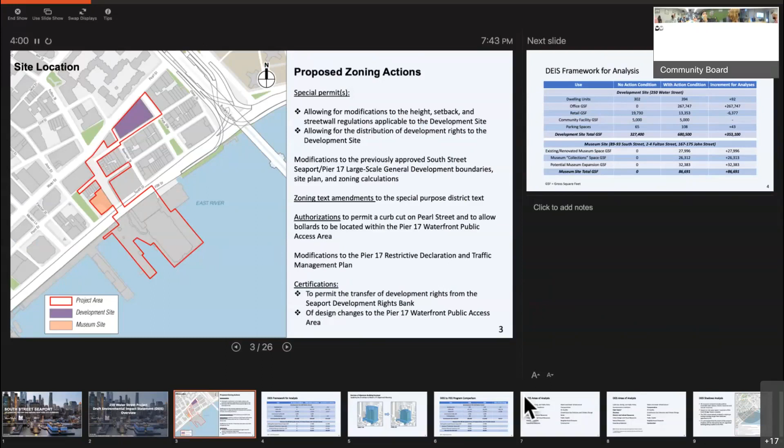So let's talk about the DEIS analysis framework and some of the changes that will be looked at in the FEIS.

For the with-action condition, the DEIS looked at the construction of a mixed-use building of about 680,000 gross square feet, which would contain market-rate and affordable housing, retail, office space, and community facility space, as well as parking.

What the DEIS uses as a basis for evaluating impacts is the difference or increment between the no-action and with-action conditions. Generally, the with-action condition takes a conservative approach in determining a reasonable worst case development scenario, which we came up with alongside the Department of City Planning for analysis purposes.

For example, the EIS uses a standard unit size of 1,000 square feet per unit, which results in a higher unit count than HHC actually intends to build. For the purposes of the environmental review, it's assumed that the proposed project would also facilitate the restoration, reopening, and potential expansion of the South Street Seaport Museum.

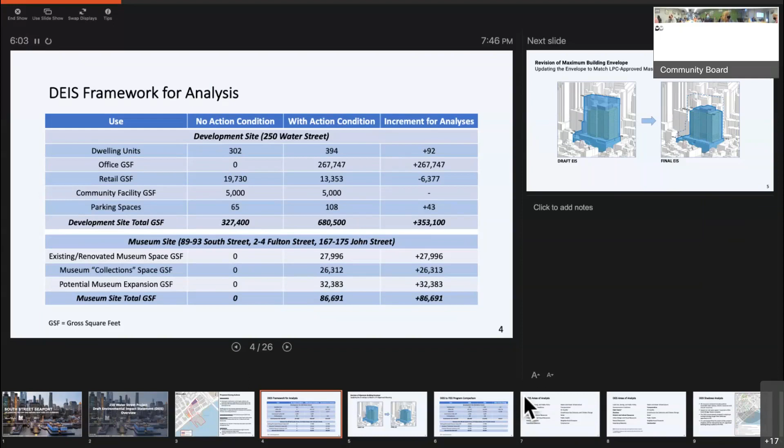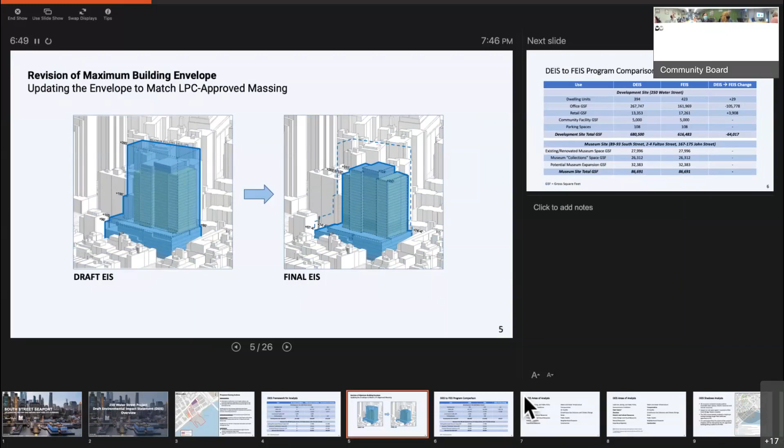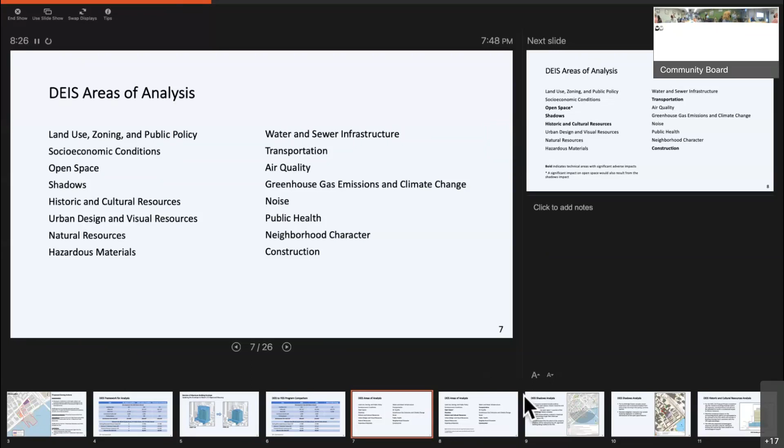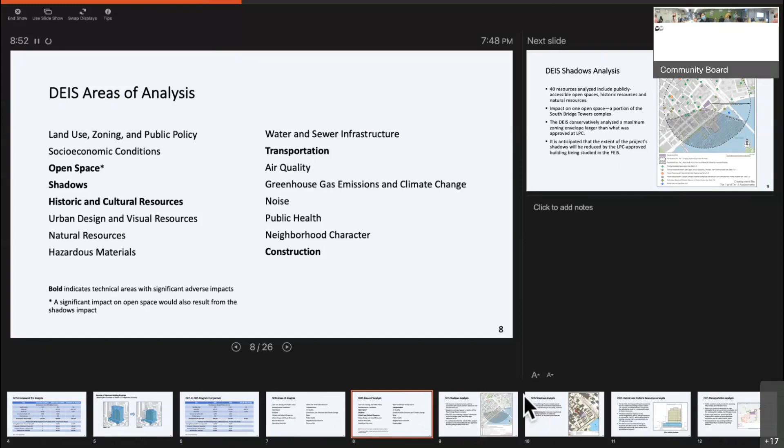This slide shows the areas in which the project could have a significant adverse impact, shown in bold. They include shadows falling on open space, historic resources, transportation, and construction. I'll go through each of these technical areas, discuss potential mitigation, and talk about some of the other areas of concern as well.

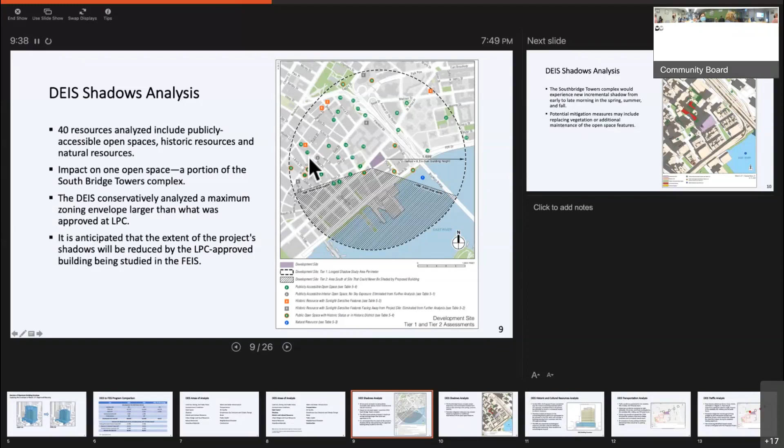It's worth noting again that the DEIS was conservatively analyzing the maximum zoning envelope, which was larger than what was ultimately approved at LPC. As such, we expect that the extent of the shadows will be reduced for the FEIS using the LPC approved building. But we don't expect that the impact will go away.

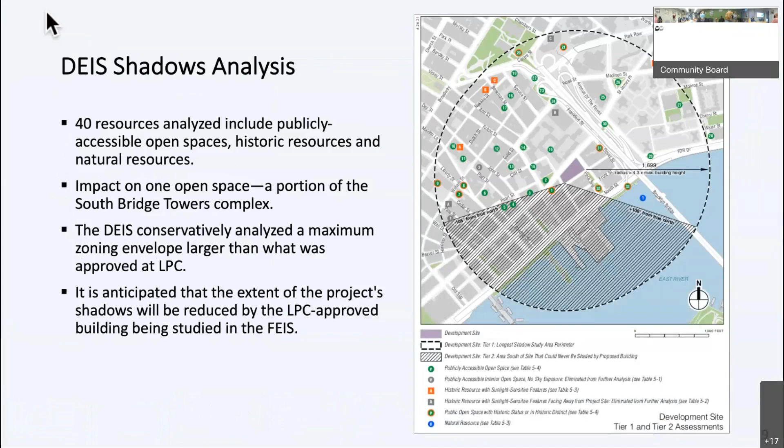Looking more closely at the affected area, and this material is in the EIS, there's a number of diagrams if you want to look at those. You can see that the incremental shadows from the 250 site would fall on certain portions of the Southbridge Tower's open spaces during the morning when the sun is in the eastern sky. This example diagram represents 9:15 a.m. on the March-September analysis day, and more or less represents the maximum coverage. By about 11 a.m., the project shadow would be completely off of the area.

Potential mitigation measures identified in the DEIS could include replacing vegetation with more shade-tolerant plantings, plants that will survive and thrive in the shade, and additional maintenance of the open space features.

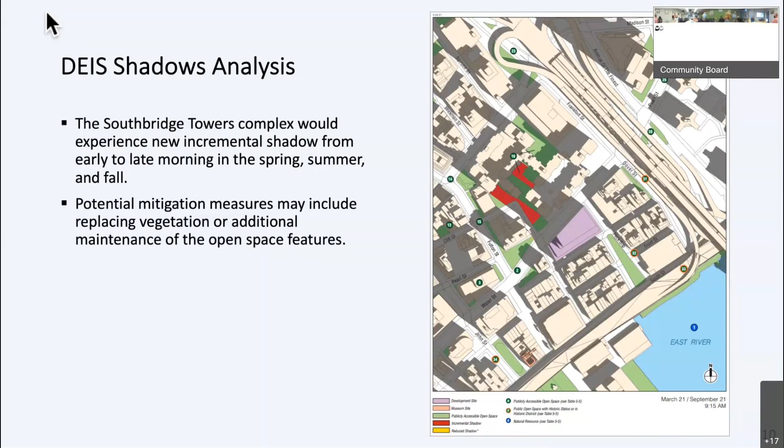The DEIS considered the maximum building envelope and determined that it would have the potential to result in a contextual impact to historic resources. Potential contextual impacts on the surrounding historic district are anticipated to be removed in the FEIS, which will consider a building massing that is consistent with the LPC-approved design. The DEIS also examined archaeological resources, and with a plan for additional testing and monitoring, there would be no archaeological impacts.

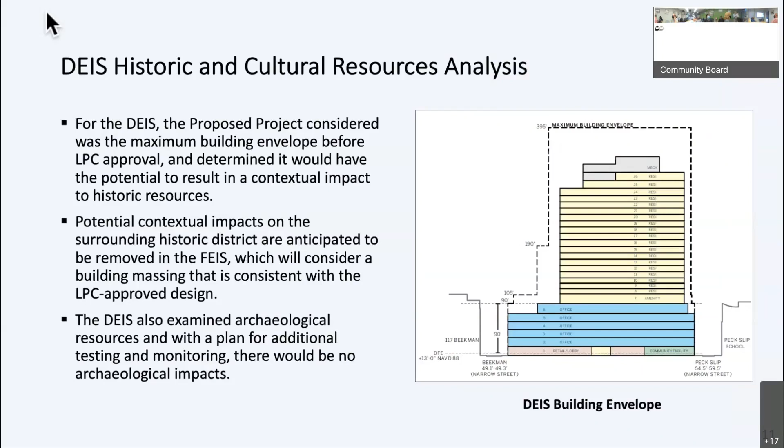The transportation section of the DEIS considered the project's potential effects on local traffic, parking, and pedestrian conditions, as well as public transit services. Traffic conditions were evaluated at 4 Pearl Street intersections for the weekday AM, midday, and PM peak hours. Pedestrian conditions were evaluated at 8 sidewalks, 10 corners, and 3 crosswalks for the weekday AM, midday, and PM peak hours. Transit trips would not exceed the CEQR threshold for analysis of bus and subway conditions, and there would be no impacts to those.

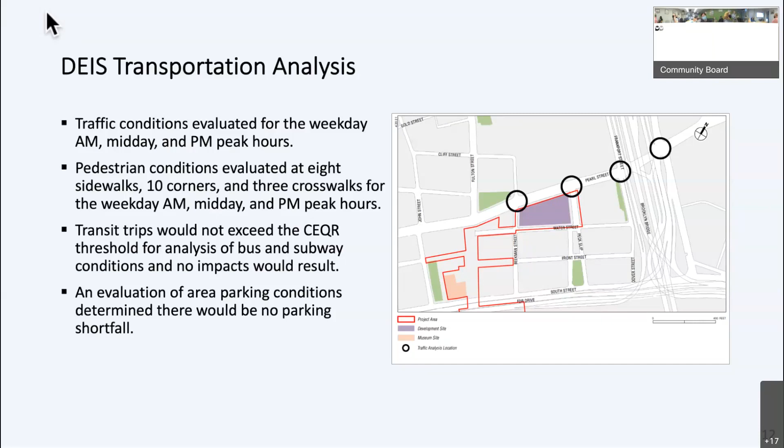An evaluation of parking conditions determined that there would not be a parking shortfall.

For vehicular traffic, potential impacts were identified at 3 intersections along Pearl Street, at Beekman Street, and at the areas next to the bridge. Those are shown in red. Proposed mitigations include signal timing changes at the intersection of Pearl and Beekman Streets, which would fully mitigate the identified impact during the weekday midday peak hour, while the remaining identified impacts would be unmitigated. It's worth noting that the majority of the impacts, which is really delays of getting through an intersection, would be less than 20 seconds.

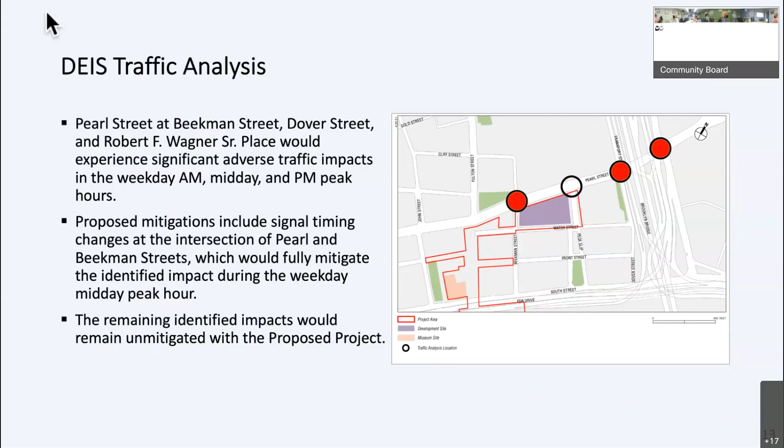For pedestrian conditions, significant adverse impacts were identified for one location, the southeast corner of Pearl Street and Frankfort Street, during the weekday midday and PM peak hours. That corner is shown up under the block in the upper right. The impacts identified at this corner could be fully mitigated by a 6-foot curb extension on the Frankfort Street side of the corner.

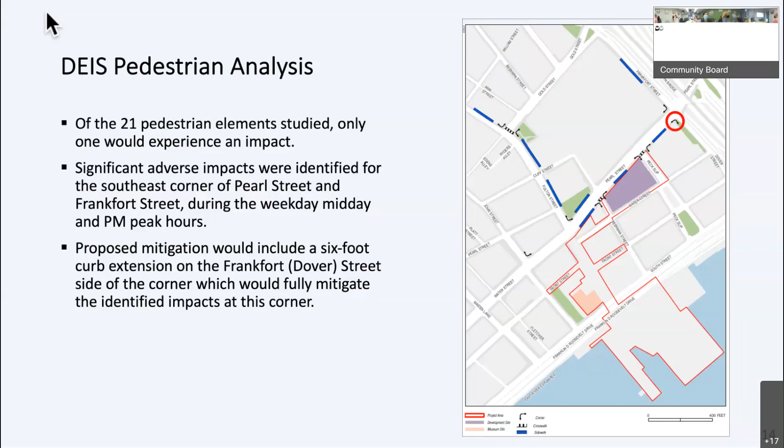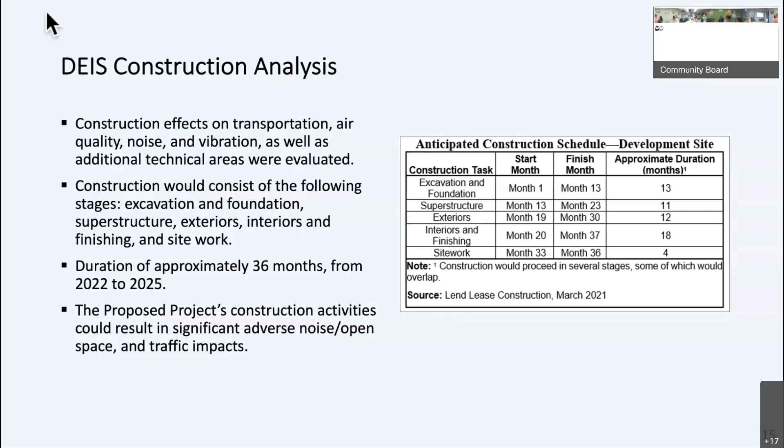The DEIS identified that the project's construction activities could result in significant adverse impacts in terms of noise, including noise to open space, and traffic. For construction traffic, it's anticipated that any significant adverse traffic impacts would be of equal or lesser magnitude than those disclosed in the operational analyses, and that the same or similar mitigation measures could be used to address construction-related impacts.

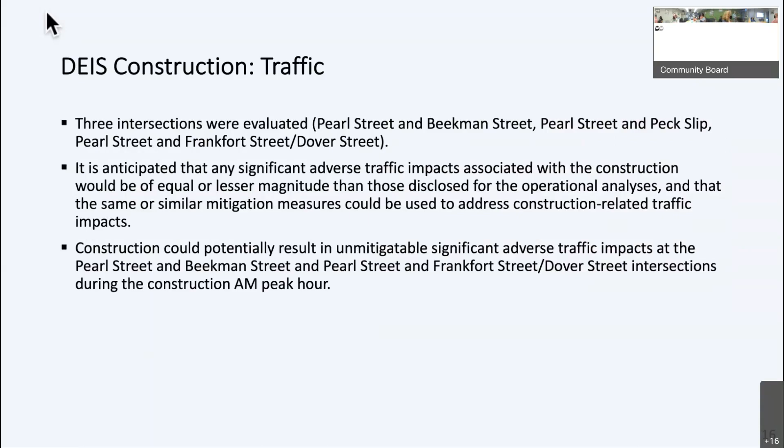There could be unmitigatable significant adverse traffic impacts on Pearl Street, at Beekman and Frankfort Street during the construction AM peak hour.

The DEIS assessed the effects of construction noise on receptors surrounding the proposed construction work areas, including schools, open space, and residential buildings. Certain receptors would experience noise impacts because nearby construction could produce noise that would be noticeable and potentially intrusive during the most noise-intensive activities.

The most noise-intensive construction would be during the excavation and foundation phase and occur for up to approximately 6 months. For comparison, these same phases for an as-of-right building would be about a month short, 5 months.

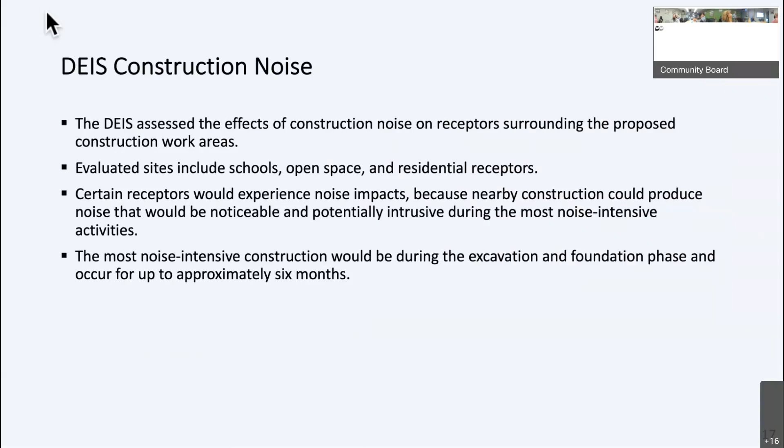There are a number of noise reduction measures that will be implemented, including using equipment that meets mandated sound level standards, using electrical equipment as early as possible, and locating non-electric equipment within buildings to the extent feasible. Also locating noisy equipment away from or shielded from sensitive receptors where logistics permit, committing to specific equipment that is less noisy, for example hoists and chipping guns, configuration of construction sites to minimize backup alarms and idling restrictions, noise barriers around the construction sites, staging concrete operations along Pearl Street inside site perimeter noise barriers, and the use of portable noise barriers or enclosures for certain dominant noise equipment to the extent feasible and practicable.

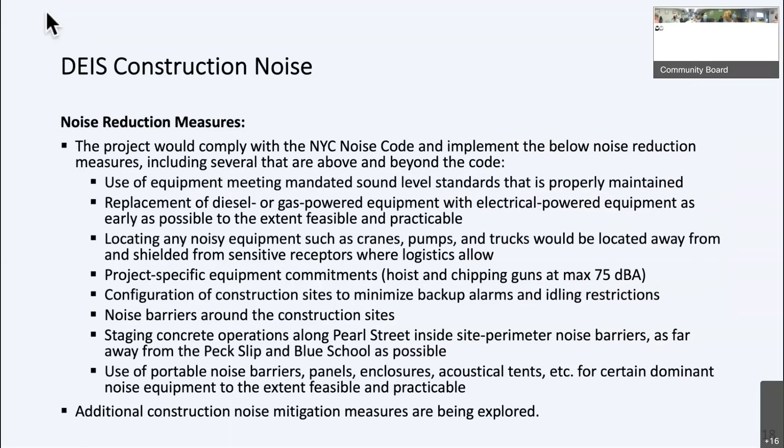Other construction noise mitigation measures are being explored as well.

For construction air quality, the DEIS determined that there would be no impact from construction emissions with the implementation of certain measures, including a dust control plan, restrictions on truck idling, use of cleaner ultra-low sulfur diesel fuel, use of electrically powered equipment to the extent practicable, use of best available tailpipe reduction technology such as diesel particulate filters, and utilization of newer equipment with lower emissions.

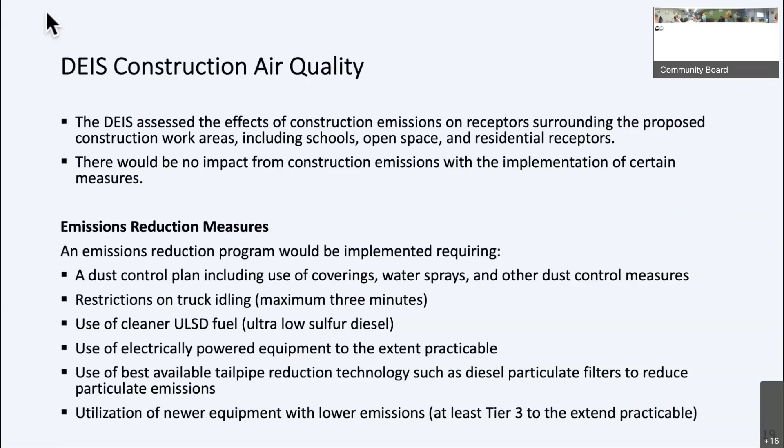The DEIS also assessed the effects of construction vibration on structures and residences near the construction site. Although no impact from construction vibration is expected, a construction protection plan will be developed and implemented in consultation with LPC. The purpose of the construction protection plan is to avoid inadvertent damage during construction to the historic buildings that are located within 90 feet of the construction site.

Among other things, the CPP would require vibration monitoring and prohibit vibrations from exceeding acceptable thresholds. If for some reason the thresholds were to be exceeded, the CPP would require construction means and methods to be altered to avoid such exceedances.

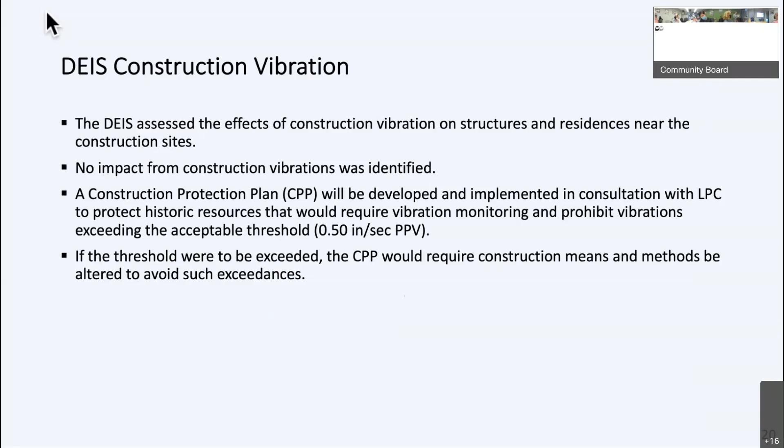There are also a number of measures that will be employed to ensure public safety during construction. These will include sidewalk bridges, safety signage, safety barriers, flag persons to control truck movements and provide guidance to pedestrians and cyclists, and safety netting.

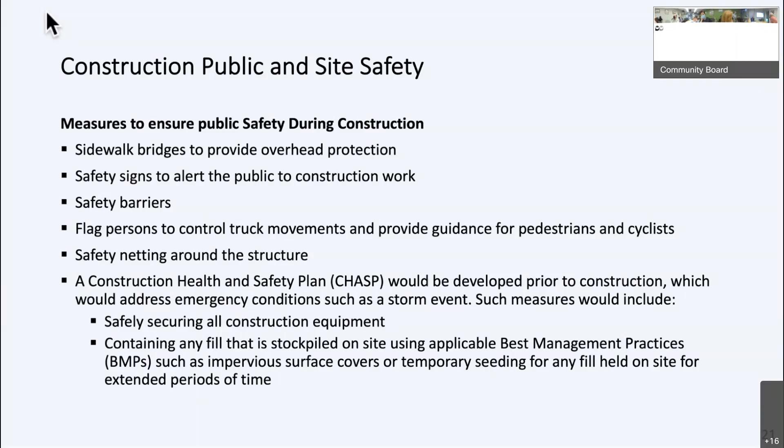In addition, as has been referenced, a construction health and safety plan would be developed prior to construction, which would address emergency conditions such as a storm event. Such measures would include safely securing all construction equipment and containing any fill that's stockpiled on site using applicable best management practices such as impervious covers or temporary seeding for any fill that's held on site.

So just a little more detail on the construction protection plan. In addition to protecting nearby buildings from inadvertent damage from ground or vibration, the CPP will cover things like protection from falling debris and accidental damage from heavy machinery during project construction. The CPP measures typically include protective coverings, pre-construction survey, vibration monitoring and crack monitoring, optical monitoring, and preparing reports.

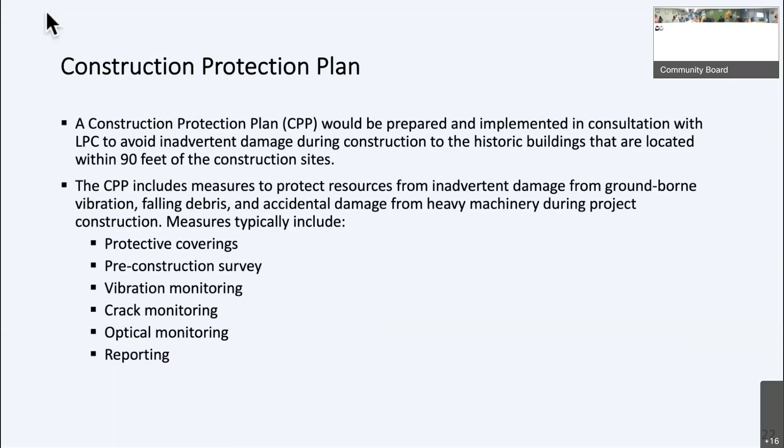The DEIS also considered hazardous materials conditions.

As Laura reported on earlier, the 250 Water Street site is in the Brownfields Cleanup Program administered by the state. I know you're intimately aware and familiar with that, so I'm not going to spend a lot of time rehashing it. But the DEIS does cross-reference that.

In summary, a remedial action work plan would be undertaken, a construction health and safety plan would be implemented, and the work plan is proposed to include tank decommissioning and removal, site-wide excavation and disposal of impacted soil, excavation and removal of sources of groundwater contamination and treatment if necessary, as well as post-remediation analysis of the soil.

What's also relevant here is that as part of the city approval process, an E-designation will be put on the site to provide additional assurance that cleanup takes place with or without the Brownfields Cleanup Program. It's worth noting, as Laura talked about, that activities for remediation and the excavation and construction will be closely coordinated.

For the John Street lot, which is not part of the Brownfields Cleanup Program, measures would include the completion of a Phase 2 investigation and preparation of a RAWP and CHASP, and a remedial plan to address any residual contamination that would be prepared and approved.

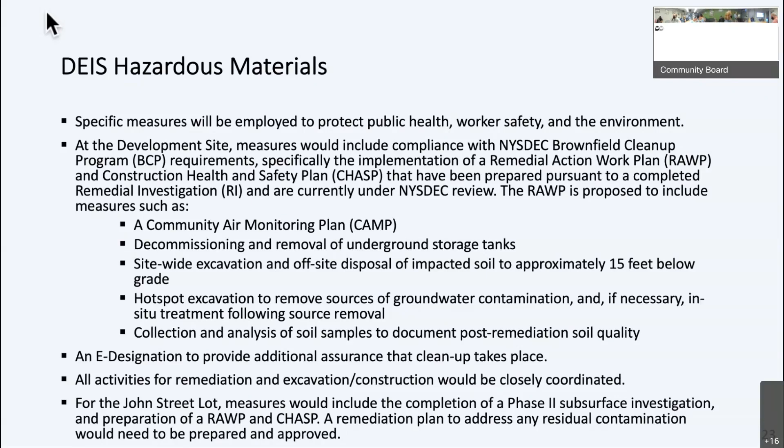To talk a little bit about some of the sustainability measures incorporated into the proposed project: in terms of greenhouse gas emissions, the project was determined in the DEIS to be consistent with the city's emission reduction goals. The project is committed to LEED Silver certification for the development site, and the applicant is working and studying strategies to reach higher levels of performance. The proposed building is anticipated to reduce energy consumption by approximately 18% and GHG emissions by 15%.

Specific sustainability measures could include landscape roofs or high albedo roofs, submetering of electricity usage, regenerative braking for elevators, lighting controls, sustainability guidelines for tenant build-outs, meeting or exceeding city and LEED requirements for stormwater retention along with reuse for irrigation, a design that can accommodate fully electric systems for commercial and office spaces with the ability to convert to residential spaces, and finally, provisions to encourage bicycle, scooter, and electric vehicle usage.

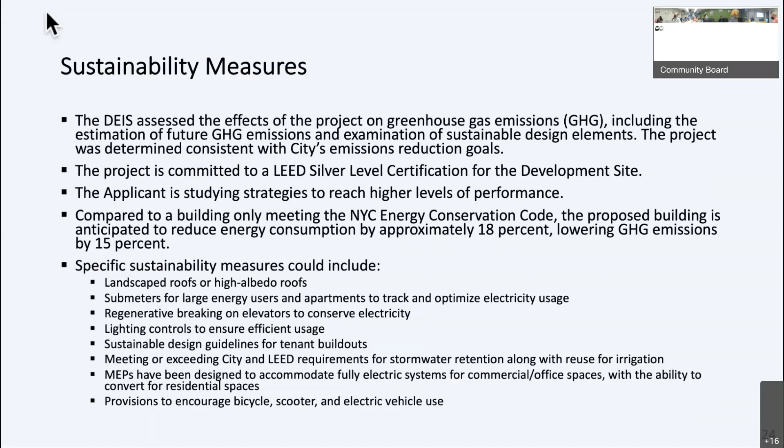Resiliency is also a very important part of the project. The DEIS assessed the resiliency of the project and determined that it would not affect the floodplain or result in increased risk of flooding in adjacent areas. Flooding in the vicinity of the project is controlled by astronomic tides and meteorological forces and is unaffected by the occupancy of a building in the floodplain. As such, the proposed project would not result in increased risk of flooding to adjacent areas or buildings.

As part of the EIS, the project was determined to be consistent with the city's waterfront revitalization program, including its resiliency policies. The project would include design features, or the ability to retrofit for features, to address flood risks through the end of the century. Resiliency measures would include consistency with Appendix G of the building code and the New York City Climate Resiliency Design Guidelines. Critical infrastructure would be elevated above the floodplain, or in the case of the cellar, dry flood-proofed. Flood-resistant glazing and flood walls would be incorporated at the ground floor, and the building would be designed to allow for future retrofitting with adaptive measures such as flood barriers.

Thank you all very much, and we look forward to hearing your comments.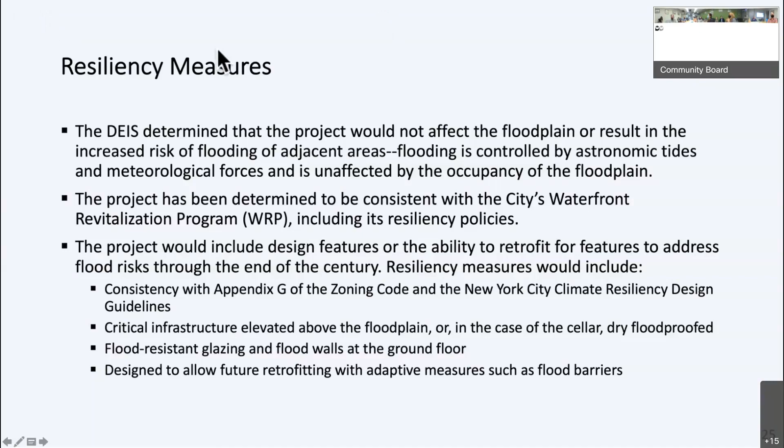Who negotiates those terms on behalf of the community? It is taken from the EIS, from the final EIS. So the lead agency, City Planning, will distill the required mitigation measures, and through their counsel's office, they put that into the restrictive declaration. And is that linked directly to the promises about the museum, the Seaport Museum?

The museum commitments are separate from that. They're not. Can I just ask a couple of things? First of all, let's go in order of the questions. Yeah, let's get Michael's question answered with my two additions.

This one, okay. As far as the shadows are concerned, there are shadows. It's all building, like any development in Manhattan, including when they built Southbridge Towers itself, cast shadows. So it's not a surprise. It's the size of the shadow, the extent of the shadow, and the duration of the shadow falling on different resources. One of the blessings of shadows is they're always moving, so they're on one part of a resource, and then an hour later they're moving onto another, and then they will finally move off.

But the EIS discloses all of the ones that were looked at, and shows what the times were for the various open spaces and playgrounds. And you have to remember, ultimately, it's not Howard Hughes or AKRF that makes the determination as to what is an impact versus just having a shadow effect where a shadow falls on something. It's the lead agency, using the technical manual, which is the guidance provided by the city for conducting these analyses. And all said and done, it was Southbridge Towers because of the size.